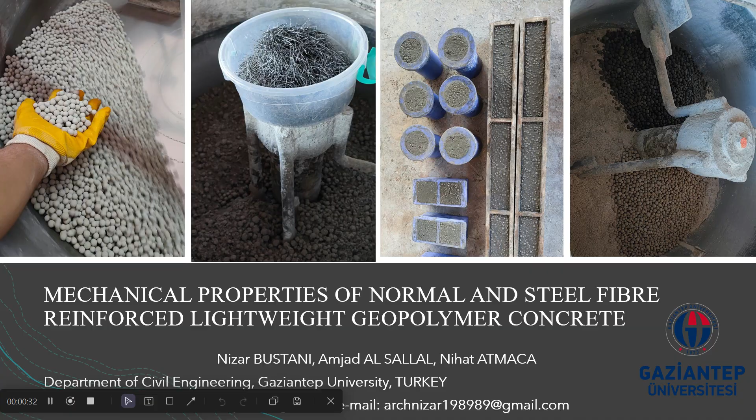We will start with the research aim. In line with the current direction to decrease the quantities of natural resources required in concrete production by using waste materials such as slag and fly ash, this research aimed to produce slag-based geopolymer concrete using lightweight artificial aggregate manufactured from slag, in order to reduce the adverse environmental effects.

The properties and amount of lightweight aggregates used have a significant impact on the properties of the concrete. Therefore, in this study, experimental research was conducted to investigate the impacts of replacing coarse river aggregate with one type of lightweight aggregate on the properties of concrete produced with and without steel fibers.

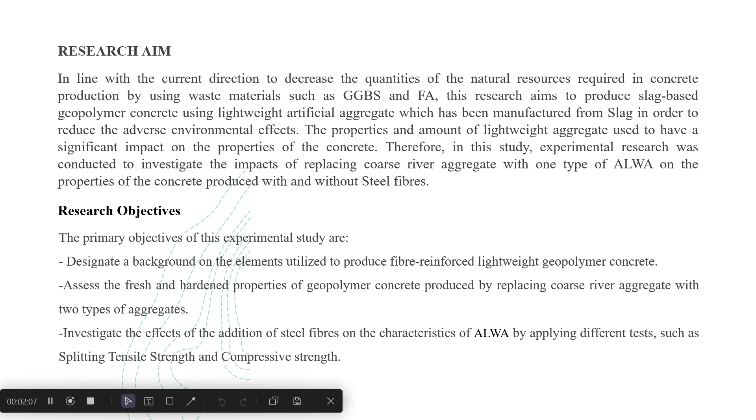The objectives of this research are: first, to establish the background on the elements utilized to produce fiber reinforced lightweight geopolymer concrete; second, to assess the fresh and hardened properties of geopolymer concrete produced by replacing coarse river aggregate with two types of aggregates; and finally, to investigate the effects of the addition of steel fibers on the characteristics of artificial lightweight aggregate by applying different tests such as splitting tensile strength and compressive strength.

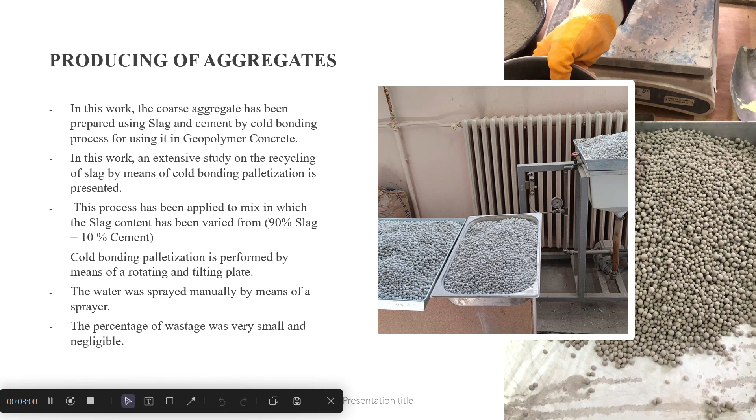As you can see in this slide, how to produce the aggregates. In our work, the coarse aggregate has been prepared using slag and cement by cold bonding process for use in geopolymer concrete. This work includes an extensive study on the recycling of slag by means of cold bonding pelletization. This process has been applied to a mix in which the slag content has been varied, 90% slag plus 10% cement. Cold bonding pelletization is performed by means of the rotating and tilting plate. The water was sprayed manually by means of a sprayer, and the percentage of wastage was very small.

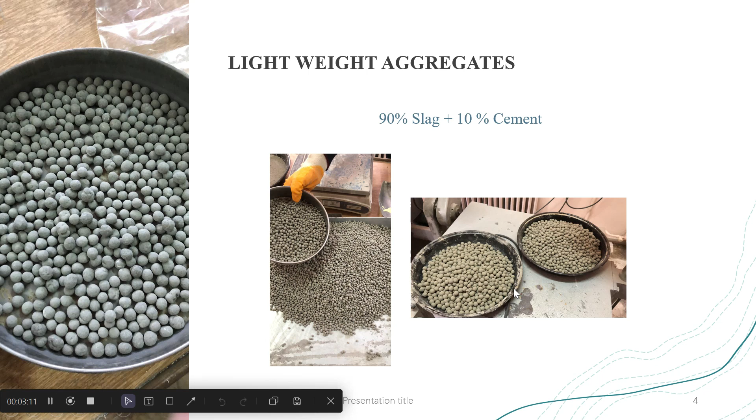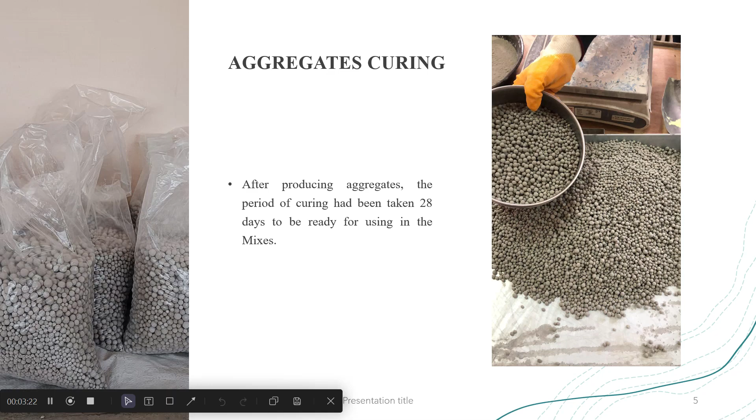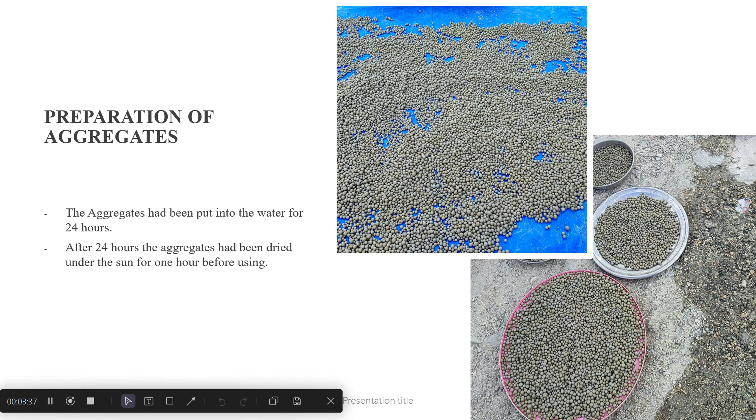As you can see, the lightweight aggregate made of slag and cement. After producing the aggregate, the curing period was 28 days to be ready for use in the mixes. Before casting the concrete and using this aggregate, the aggregate had been put into water for 24 hours. After 24 hours, the aggregates had been dried under the sun for 1 hour before use.

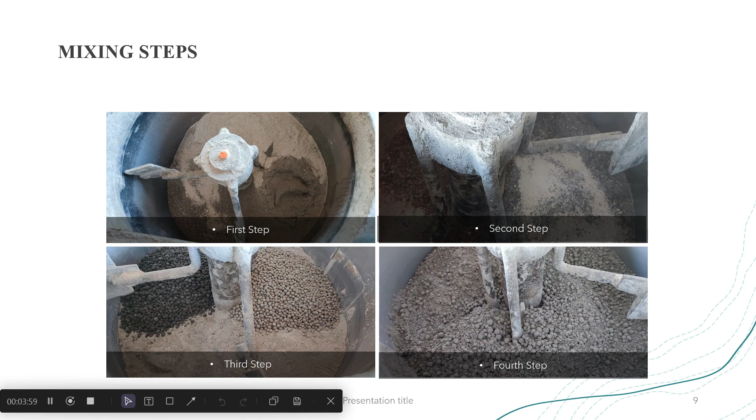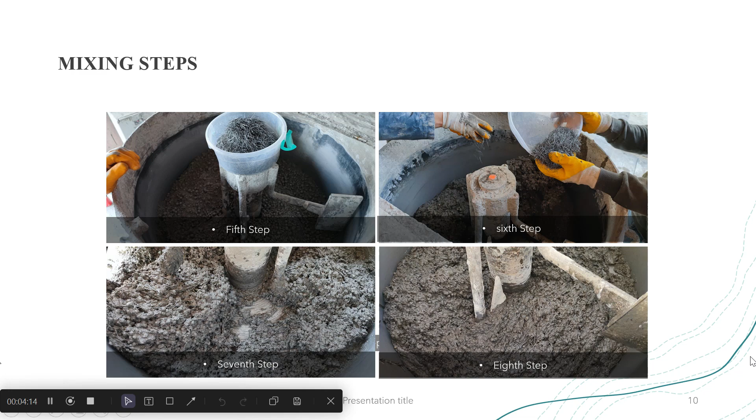This is the mixing process. We started with the first step, adding the sand and fly ash, and in the second step we mix it. In the third and fourth steps we added the aggregates of slag and mixed it. In the next steps we added the steel fiber and the sodium silicate, as you can see in the picture.

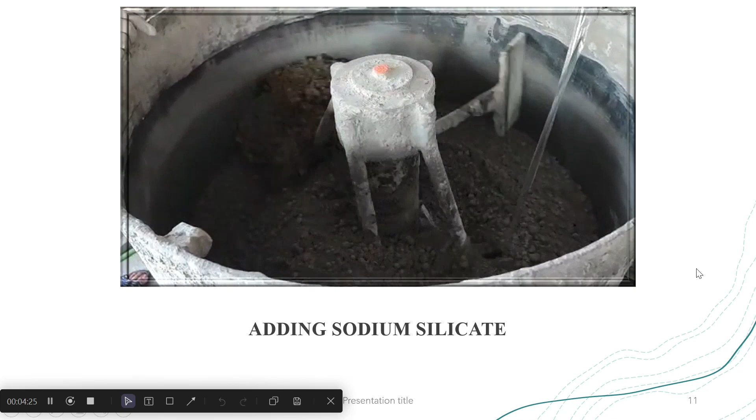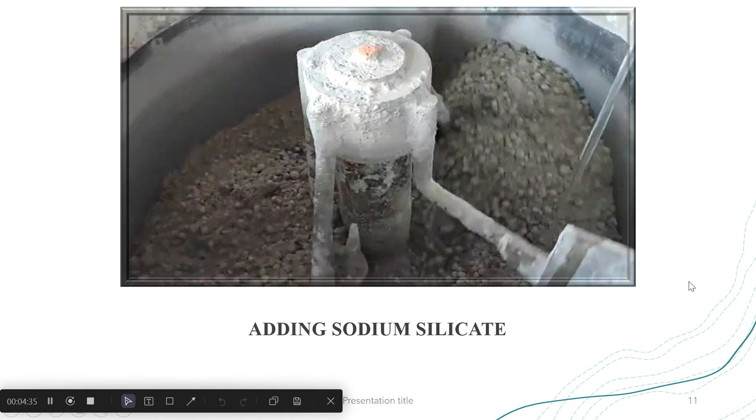Let me show this mixture. This is adding the sodium silicate for the mixture, and after that, adding the steel fiber for this mixture.

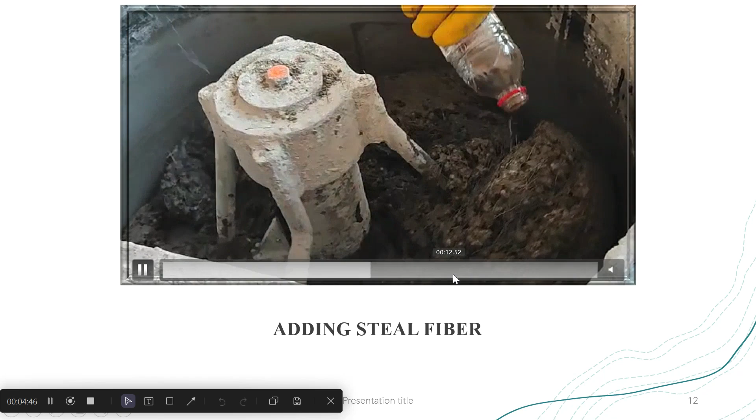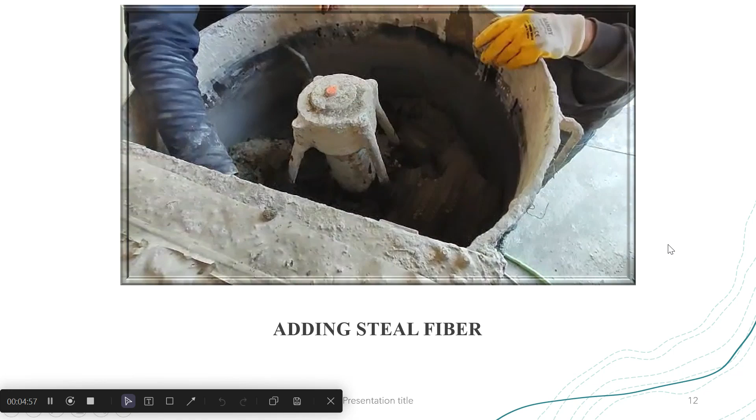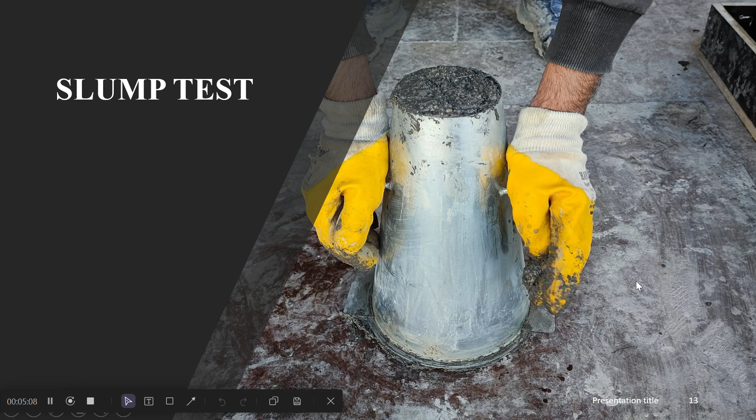We have two types of concrete: with steel fiber, and without steel fiber. After the casting, we tested with the slump test to check the workability of this mortar, as you can see in this slide.

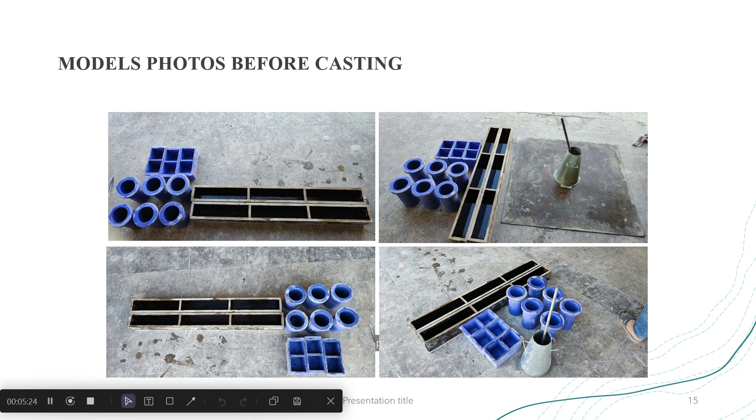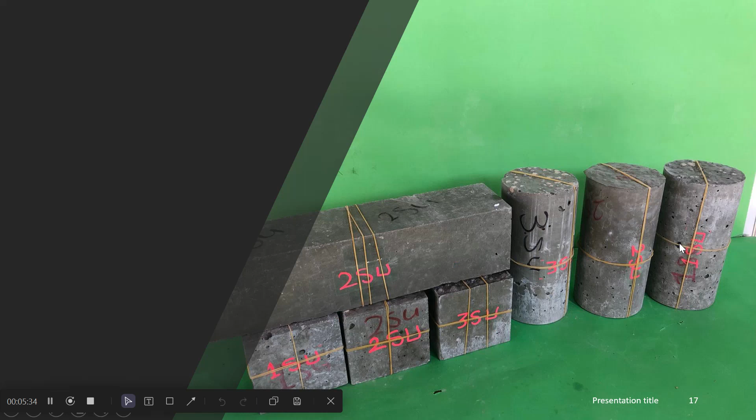This is the molds photo before casting. We have cube, cylinder, and prism molds. This is the molds after the casting, and these are samples after casting, as you can see in this slide.

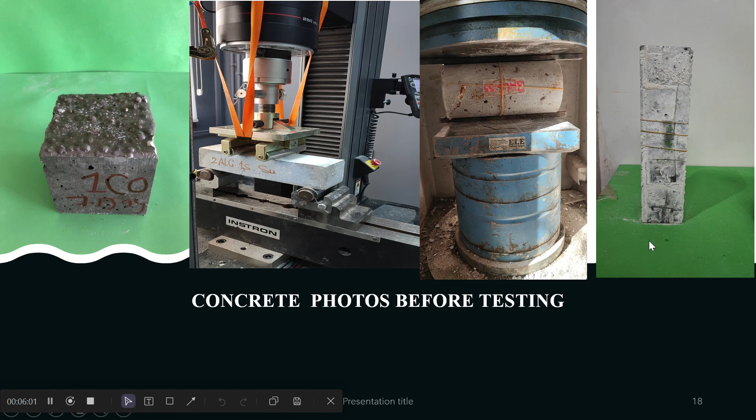You can see the concrete photos before testing the samples for strength and splitting tensile tests. As you can see in this picture, these are the samples' photos after the testing, showing the 0.5% steel fiber in these samples.

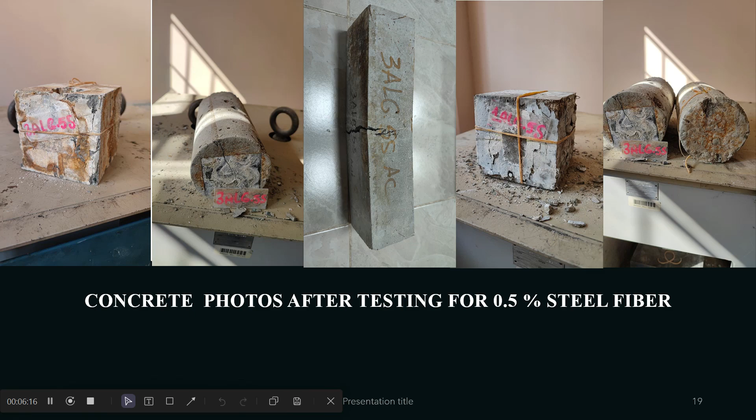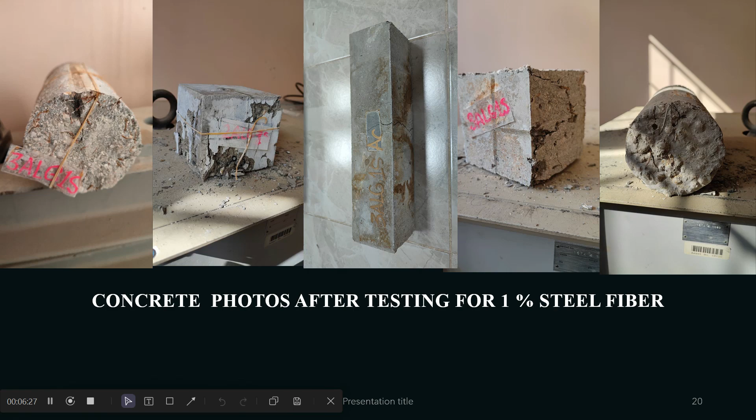In the next slide, you can see the photos for samples that contain 1% steel fiber in this mortar.

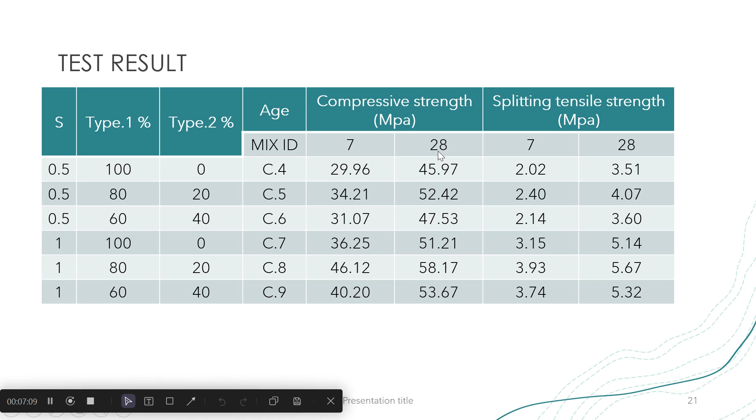For the results in this research, as you can see, we have two types: 0.5% steel fiber and 1% steel fiber. You can see the results for the compressive strength and for splitting tensile strength in the mixes for 7 days and for after 28 days. As you can see in this slide, the first mix shows the value.

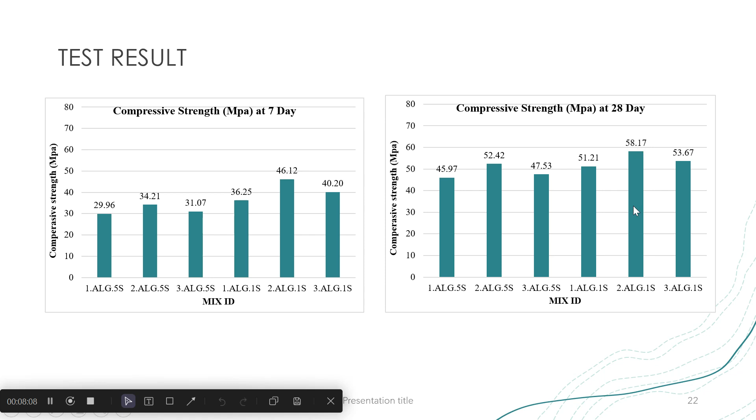The value is 29.96 megapascal, and the high value is 46.12 after 7 days of casting. After 28 days, the compressive strength value for the first mix is 45.97 megapascal, and the high value is 58.17 megapascal.

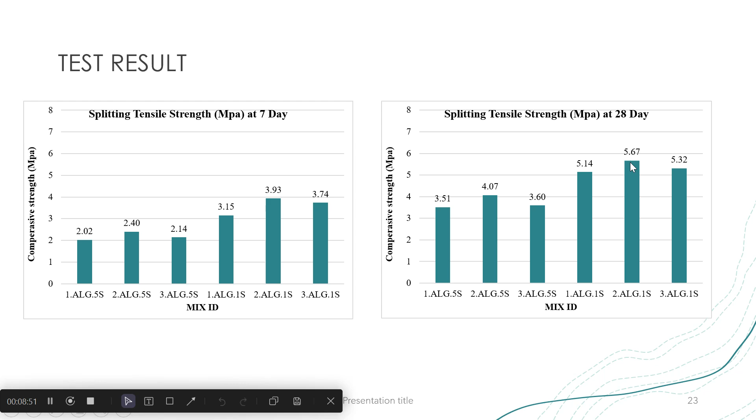For the other test, splitting tensile strength, after 7 days we have 2.02 for the first mix, and for the fifth mix we have 3.93 megapascal. After 28 days, we have the high value for splitting tensile strength, which is 5.67 megapascal.

Finally, we'll talk about the conclusion for this research. It can be concluded that the performance of lightweight aggregate geopolymer is close to normal ordinary Portland cement concrete in terms of workability and mechanical properties. Moreover, these properties can be approved for construction application on sites.

Second, the presence of steel fiber in the lightweight aggregate geopolymer mixture at 0.5% and 1% significantly improves mechanical properties. However, there is a slight decrease in workability for the 1% steel fiber mixture.

Third, a high bond between aggregate, artificial aggregate, and steel fiber with the geopolymer matrix was observed in all mixtures.

Fourth, the compressive strengths range between 29.96 and 58.17 megapascal at 7 and 28 days respectively.

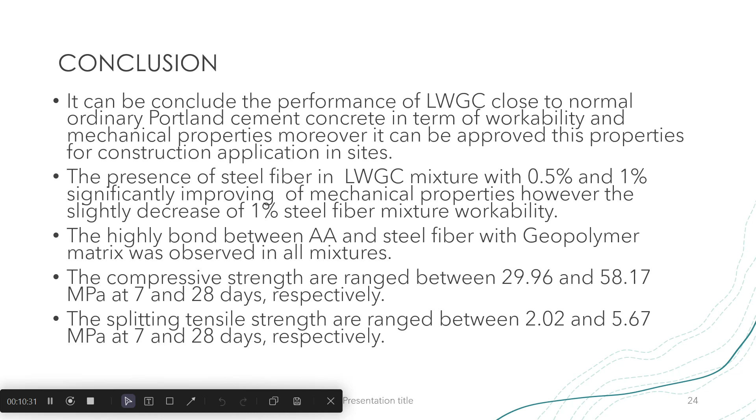Finally, the splitting tensile strengths range between 2.0 and 5.67 megapascal at 7 and 28 days respectively. Thank you for your listening.